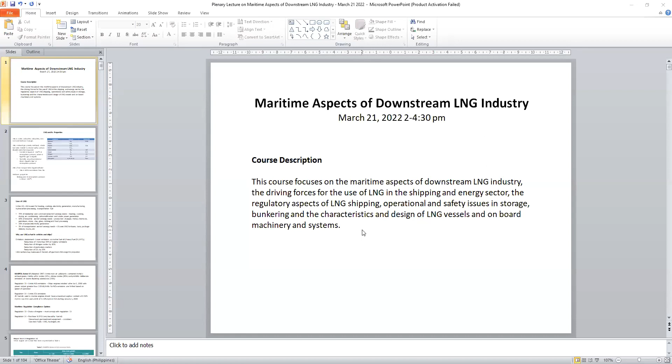Yeah. Can you hear me? Yes, sir. Yeah, okay. Yes sir. Loud and clear.

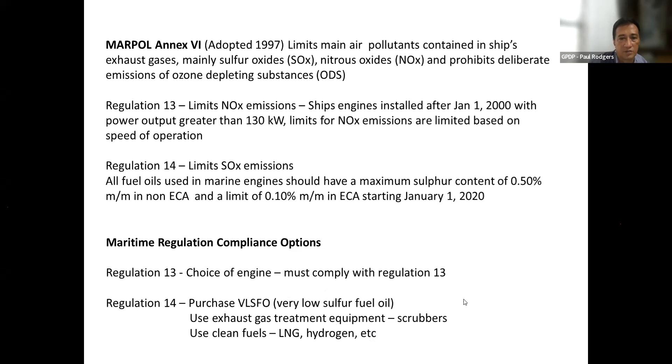Let's take a look at Regulation 13, which is about NOx emissions. Vessel engines are to have nitrous oxide limits as prescribed in Table 1. This table indicates the different levels of compliance - we have Tier 1, Tier 2, and Tier 3 engines. Tier 1 engines are primarily those installed and built on or after the year 2000. With these engines, these are the allowable levels of nitrous oxide in the exhaust. The N here represents the operating speed of the engine - we have very low speed engines, intermediate speed engines, and high speed marine engines.

For Tier 2, these are engines that were installed or built on or after the year 2011. Their nitrous oxide limits are even lower than the levels allowable for engines built earlier under Tier 1. And finally, we have Tier 3 engines, for vessels with engines built on or after 2016. Their nitrous oxide limits are restricted to much smaller amounts - Tier 3 is much stricter.

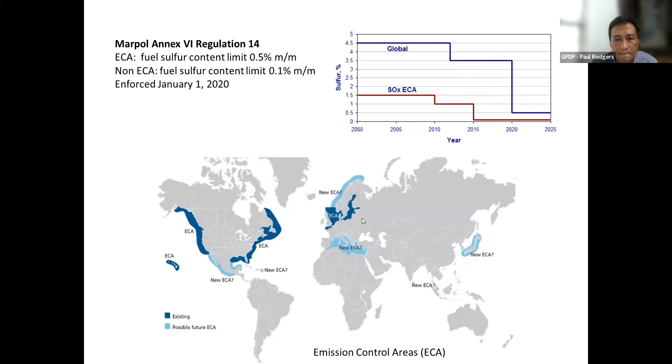It's a small area, but however, there are many recorded accidents with regards to LNG. So although it is said to be relatively safe because this area for which the vapor is combustible is small, there are many cases of recorded accidents, and some of them are quite catastrophic.

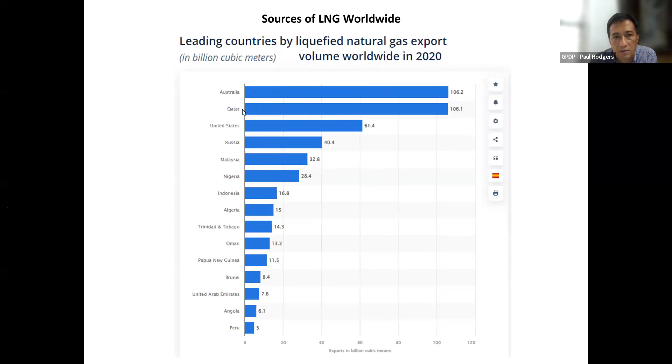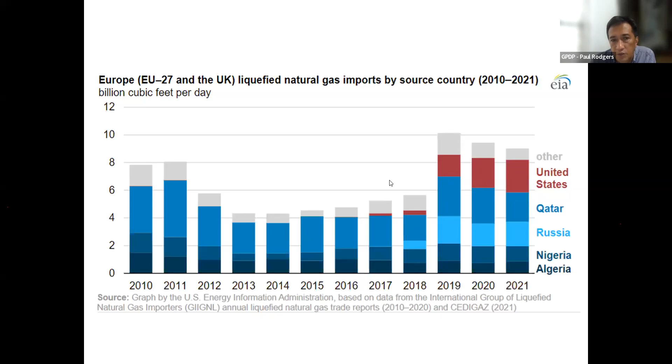Just a little bit of history - what was the first LNG carrier? The first LNG carrier was called the Methane Pioneer. It was originally constructed as a Liberty ship in 1945 for the Second World War. Later on, after the war, it was converted into an LNG tanker. The dead weight of the vessel was 5,000 tons, and it was used to carry LNG from Louisiana to Canvey Island in the UK.

It had a cargo area or cargo volume that could accommodate 2,000 tons of LNG, and it was utilized as an LNG carrier for 8 years. After 8 years, it was later converted to an LNG storage facility. So this vessel had a very long life, but it was relatively a small vessel.

In 1963, two sister vessels were made. These were launched in 1963 and entered service in 1964. These are the Methane Princess and the Methane Progress. These vessels were decommissioned and scrapped in 1997, so again a very long life, about 33 to 34 years in service.

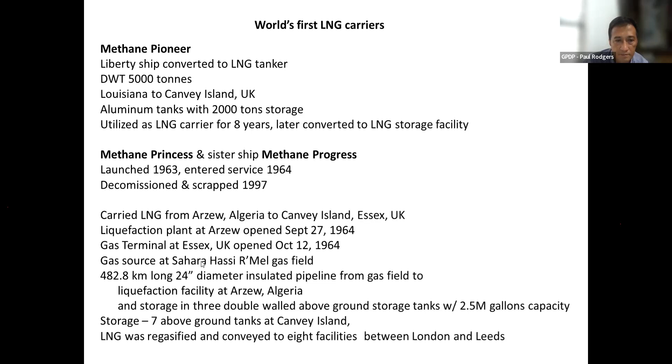they already used conventional fuel and boil-off gas from the cargo, so the engines were dual fuel. They provided 13,750 horsepower, giving the ship a speed of 17.5 knots, and there were 29 voyages per year for the vessels.

They provided LNG to 275,000 people per year. The vessels had 9 independent LNG tanks constructed from 5083 grade aluminum alloys, and they were insulated with balsa wood, plywood, and glass fiber.

So not much has changed, right? Even today, this is still the insulation being used, and the LNG cargo tanks are still sometimes made with aluminum alloys. Dual fuel is still used by some, with conventional fuel plus boil-off gas from the cargo.

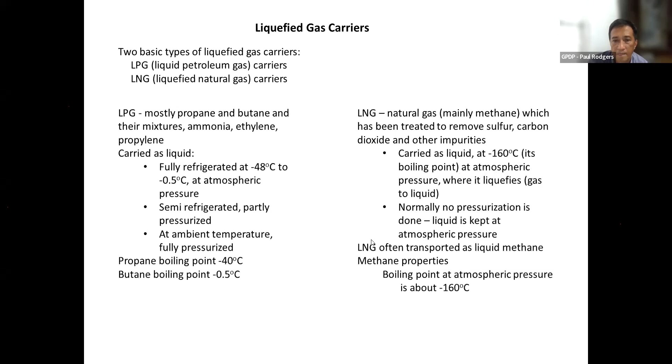LPG ships carry a liquefaction plant to reliquefy vaporized LPG. If you imagine, the cargo tanks are exposed to sunlight and heat, so the cargo inside heats up even if the tanks are well insulated, and as a result some of the gases boil off or evaporate. It would be a waste to just vent the gases.

LPG has a temperature of -40 degrees centigrade for propane, or -0.5 degrees centigrade for butane, so the temperature isn't too low, and the product or gases can be easily reliquefied.

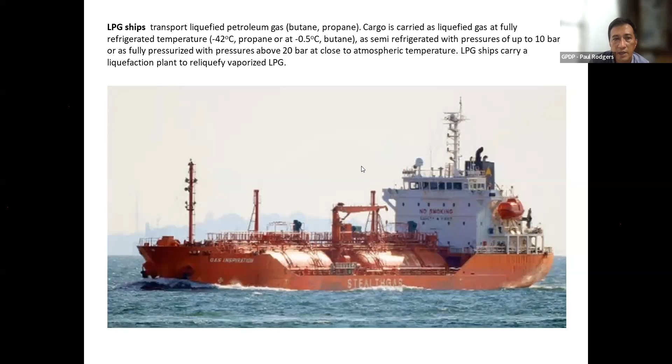But for LNG, the temperature is way lower, so a lot of work is necessary to reliquefy the boil-off gases. So instead of reliquefying the boil-off gas or venting it to the atmosphere, it is pressurized slightly, and that pressurized gas is fed to the main engines or auxiliary engines of the vessel.

So here are some common structures of tanks in LNG vessels. Tanks are well insulated to transport the liquid natural gas at cryogenic temperatures. Some of the tanks are prismatic in shape, as shown in the figure above, and some tanks are spherical in shape, as shown in this figure below.

So there are several types of tanks used for LNG cargo. The typical midship section of an LNG vessel looks like this. We normally have an inner tank that carries the cargo, and the vessel is usually a double hull tanker for protection of the cargo. Sometimes the spaces between the primary hull and the secondary hull are filled with nitrogen to create an inert atmosphere in between the cargo and the outside.

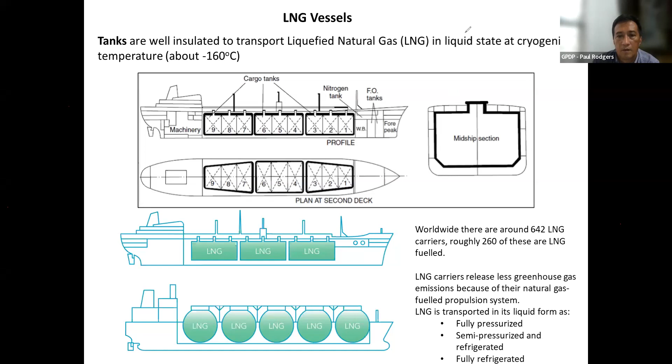Other than the spherical design, as mentioned earlier, we also have a prismatic design. We'll go back to the classification of tanks for LNG vessels later.

Now let's take a look at the LNG liquefaction process. When the natural gas is extracted from the earth, it passes through several processes. It passes through a gas metering and pressure control process, where the gas, initially at a temperature of 40 degrees centigrade, is set to a temperature of between 16 to 29 degrees centigrade.

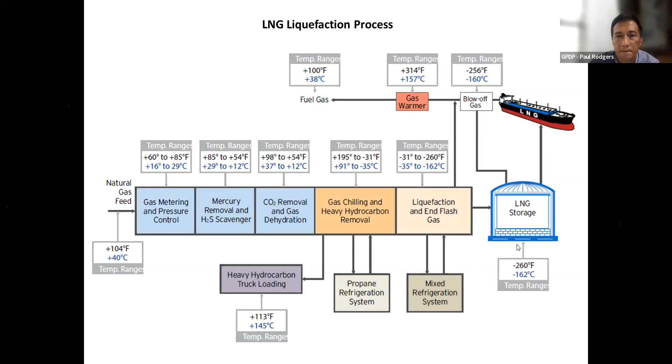So how does an LNG storage facility look like? This is a drawing of an onshore LNG storage facility. We have an inner tank, then a wall insulation, and an outer tank. The roof and the floor or bottom are also insulated. So the basic structure is you have two barriers, a primary barrier inside and a secondary barrier outside, and in between you have insulation to prevent heat transfer from occurring into the liquid cargo inside.

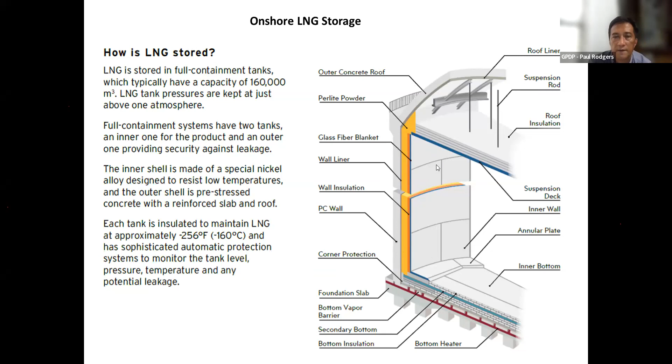We've been looking at LNG carriers, but there are actually a few other facilities that serve similar functions as LNG carriers: the FSU, FRU, and FSRU. These are offshore facilities. The FSU is a floating storage unit, used for storage only of LNG - there is no regasification done, only storage. FRUs are floating regasification units.

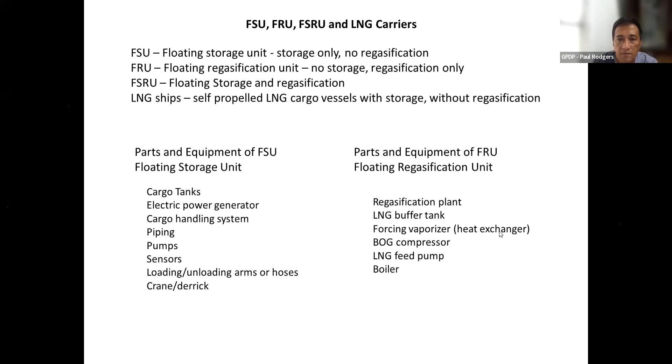For the FRU, or floating regasification unit, we have a regasification plant in the facility. But we don't have cargo tanks. So the parts, other than the regasification plant, we have an LNG buffer tank, a forcing vaporizer. This is a part of the regasification system. BOG compressor, or boil off gas compressor, increases the pressure of the boil off gas coming from the tanks when the FRU is connected to a storage facility. And we have the LNG feed pump and a boiler. So the boiler again is a part of the regasification system of the FRU.

On the other hand, we have cargo tanks, a cargo handling system, pumps, pipings, sensors, and loading and unloading arms or hoses, and a crane and derrick, which is for cargo handling.

So here's a schematic diagram of an FSU. We have the cargo tanks. This is primarily for storage, but we do have machinery to produce electricity, and we have a pumping system. And we have the derricks or cranes and the cargo manifold at both sides for loading and unloading LNG to the FSU. So these are the facilities of an FSU.

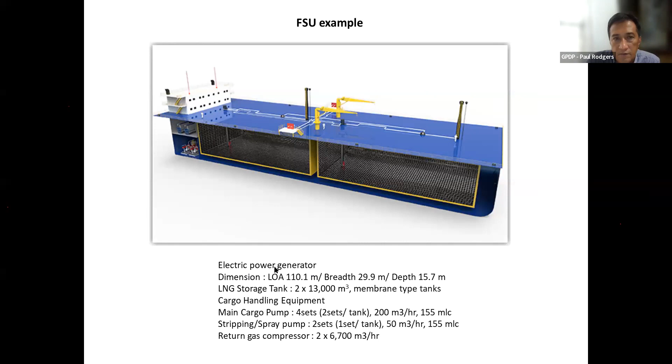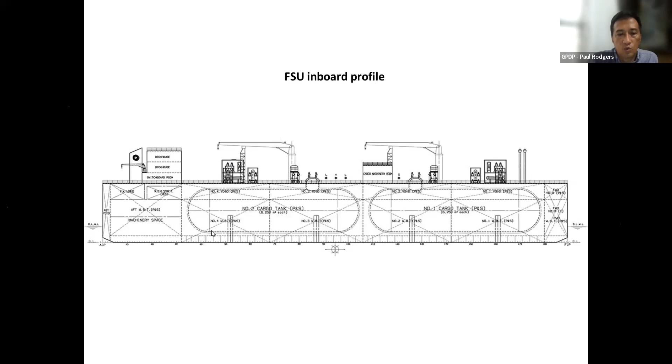This is a drawing of the inboard profile of an FSU. So we have the cargo tanks. We have probably the cargo handling facilities, and we have the crane, and we have the manifolds. And in the aft of the vessel, we have the machinery space and a pumping station to handle the liquid LNG.

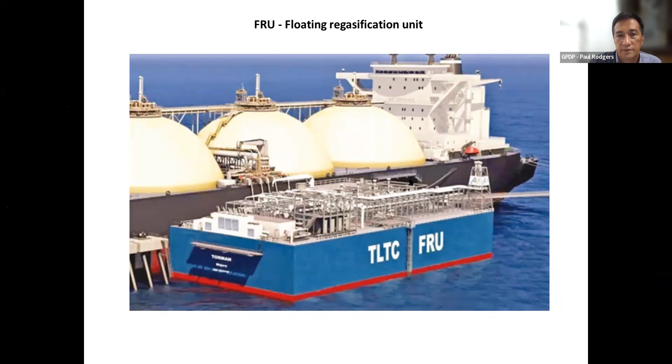So here's another possible setup. Here we have an LNG carrier, an FSU, and an FRU. And from the FRU, the LNG goes to the client or the customer. In this case, the client is an LNG power plant. So the LNG carrier delivers LNG to the floating storage unit. The floating storage unit delivers LNG to the regasification unit, and the regasification unit now delivers LNG in gaseous form to the power plant.

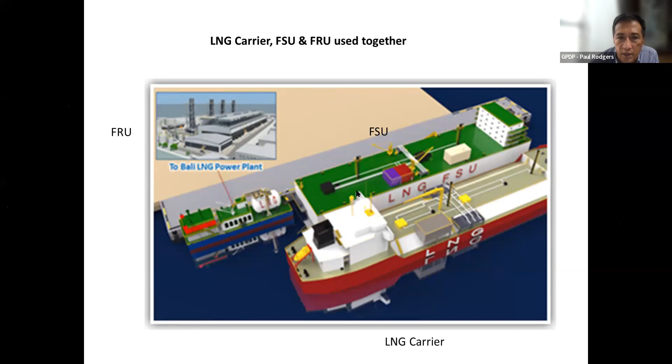However, one limitation of FSRUs is that they have potentially smaller capacity than onshore facilities, and also a shorter lifespan because the vessel itself is subject to marine conditions. The environment is somewhat corrosive, and the action of waves and other environmental influences could shorten the life of the vessel.

But again, it's a good option for a facility that uses LNG, because instead of building their own onshore storage and regasification facility, they can just charter a vessel like this. Chartering would shorten the lead time and also shift the financial burden of a huge investment on a facility and put it on charter expenses instead.

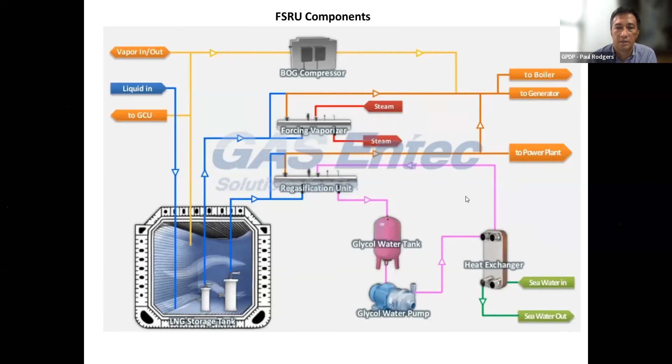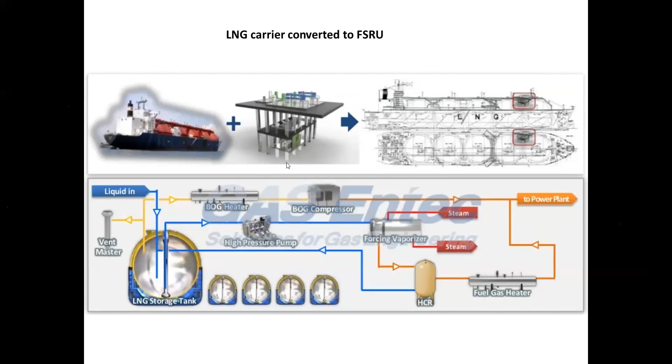Here's a picture of a conversion of an LNG carrier to an FSRU. What's added here is the regasification unit, which essentially is a heat exchanger, which in some cases makes use of seawater to heat up the LNG. So this is the structure after regasification. Sometimes we have a fuel gas heater to help in the regasification.

So again, here's another example of a converted vessel. What was added is just the regasification unit. It transforms the LNG at -160 degrees centigrade into gas at a higher pressure. Seawater is used to heat the LNG from -160 to around 8 degrees centigrade.

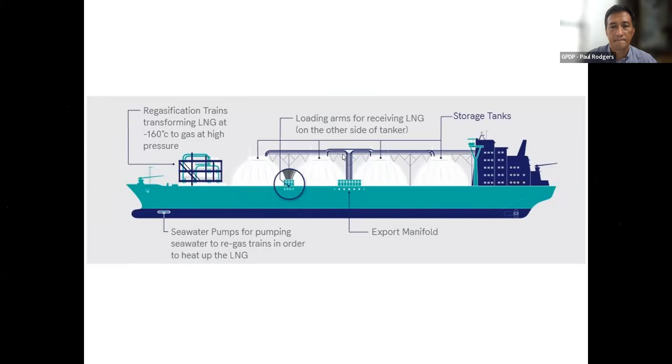What are the risks associated with an FSRU? Of course, we have fire and explosion. As I said earlier, methane can burn only at a certain concentration, but many accidents are still recorded in LNG operations.

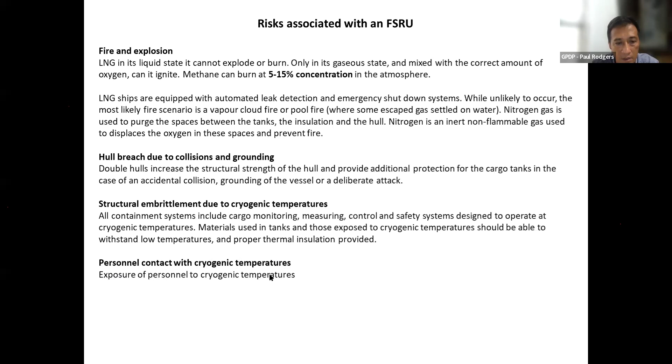What are the design standards used for LNG vessels, FSUs, FRUs, and FSRUs? One of the entities or organizations that have design standards are the classification societies. Primarily active among these classification societies are those that are members of the International Association of Classification Societies.

Like ABS, Lloyd's, DNV, BV, GL. There's also a standard, the IGC code, which is used for construction of equipment of ships carrying liquefied gases in bulk. Of course, the design constraints would be, other than the particulars of the mission of the vessel, environmental regulations, such as sulfur oxide emissions, particulate matter emissions, NOx, CO2, and solid and liquid waste regulations.

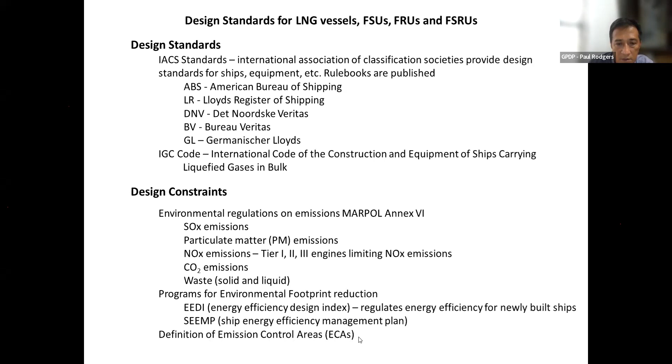Design constraints also include programs for environmental footprint reduction, like EEDI and SEEMP. EEDI is Energy Efficiency Design Index, and SEEMP is the Ship Energy Efficiency Management Plan. Emission control areas also influence the type of engines used for the vessel, since they define the emission limits.

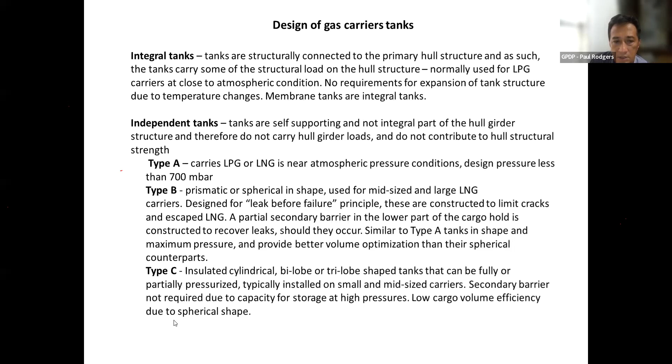Normally, the aluminum is better than steel for the inner space, because the aluminum can withstand lower temperatures without any embrittlement of the metal. And normally there is an inert space in between the insulation and the inner tank to provide additional insulation for the cargo.

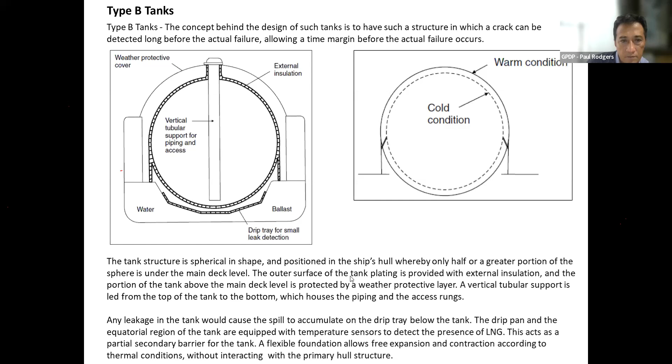For Type C tanks, these are designed as cryogenic pressure vessels. The condition of the cargo here is pressurized, not atmospheric pressure or something near atmospheric pressure. Pressures could range above 2,000 millibars, and the tanks are designed to be pressure vessels, using conventional pressure vessel codes.

These tanks do not require a secondary barrier. Rather, to detect leakage from the tanks, the cargo hold space is filled with inert gas or dry air, and sensors are placed in the hold space, which can detect changes in composition of the inert gas or dry air due to vapor pressure of the fuel. Leakage can therefore be detected and prevented.

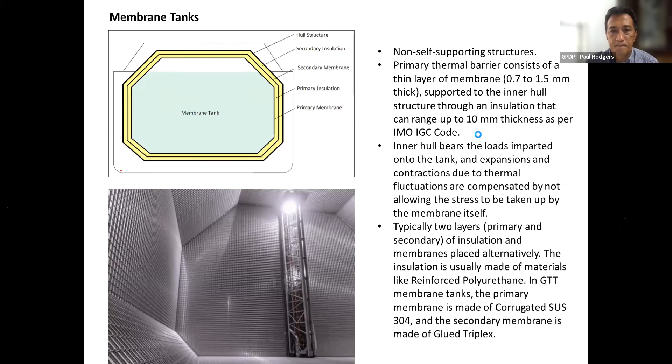So again, if you look at the classification of the LNG tanks, we have integral tanks and independent tanks. The independent tanks are classified as Type A, Type B, and Type C, and the membrane tanks are integral tanks. Integral tanks carry some structural load, but the cargo is primarily in a refrigerated or cryogenic condition, but at atmospheric pressure. On the other hand, with the independent tanks, these tanks do not carry any structural load.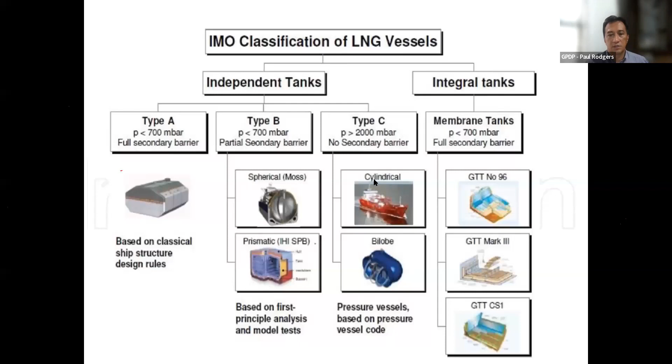They are not really connected rigidly to the hull of the vessel, and we have Type A and Type B at low pressures, but Type C is a fully pressurized design.

Okay, now let's take a look at the bunkering operation, precautions, procedures, and checklists. Bunkering is the process of transferring oil supplies to the ship, and it is normally done in ports before, but now it can be done at sea under normal weather conditions. This is called ship-to-ship transfer or ship-to-ship bunkering.

Bunkering could be from an onshore facility, or it could be done from trucks, or it could be done from ships. So depending on the source, it could be shore-to-ship bunkering, truck-to-ship bunkering, or ship-to-ship bunkering. And the receiving ship is a vessel that receives the LNG from the source.

What are the advantages and disadvantages of ship-to-ship bunkering? For the advantages, we no longer need to turn the ship off course for bunkering because it can meet up with the bunkering vessel on the sea. It saves a lot of time that takes to go to a particular port for the purpose none other than bunkering.

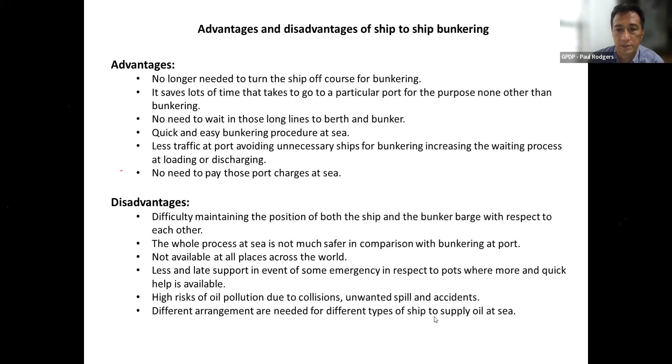What are the preparations and checks before doing bunkering operations? First, there has to be a ship compatibility study. The bunkering barge and the receiving vessel have to clarify each other's roles and responsibilities. They have to agree on a delivery location with the proper permits in place. And if the vessel is bunkering on port, does the vessel fit the jetty?

Also, they have to check if the hose lengths or the piping lengths and dimensions are correct for the operation. And also, they have to check whether emergency shutdown equipment are available.

There are two basic types of emergency shutdown. Number one is stopping operation, and number two is through the use of a quick disconnect or quick separate hose or loading arm. There are designs of quick connect, disconnect hoses, whereby if the hoses are pulled apart, there is a closing mechanism on each part of the hose to prevent any spillage of LNG from either side, whether from the bunkering barge or from the receiving vessel.

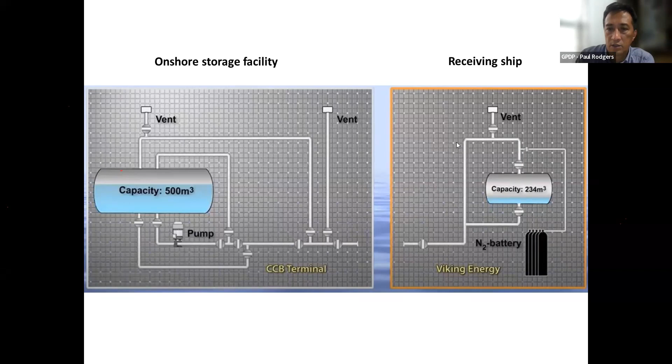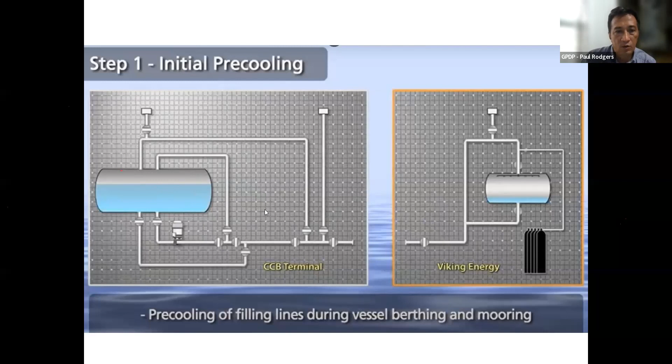The initial step is pre-cooling. The pre-cooling of the filling lines should be done during the vessel berthing and mooring. Beforehand, this operation can already be started when the vessel approaches the berth. So what happens here? First, you allow vapor to go through the pipes, the outer pipes, vapor only for now. The intention here is to allow some initial pre-cooling of the piping, because the LNG is at a very low temperature. This is normally at ambient temperature, so there's a difference of around 180 degrees Celsius.

So if this is not pre-cooled, there could be some sudden flashing of liquid to vapor, and that could lead to sudden increases of pressure in the piping. So the piping needs to be cooled down well. But this is still pre-cooling because what's being used is vapor first.

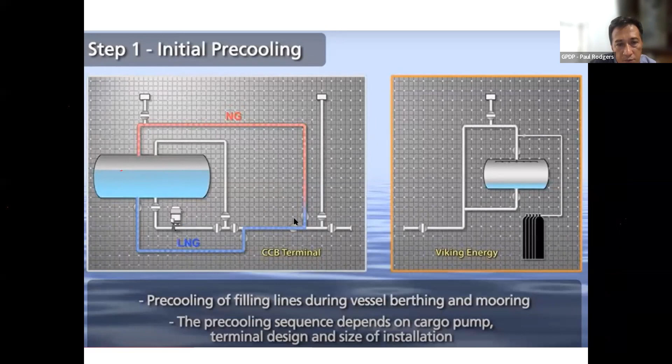And then you allow liquid LNG to flow through the piping. This is much colder, but the pump isn't being used yet. So when the liquid fully fills the lines, then you have fully cooled or pre-cooled the piping. This occurs at a duration of around 45 minutes.

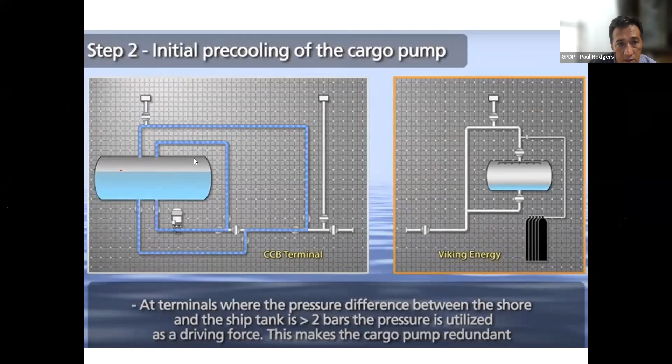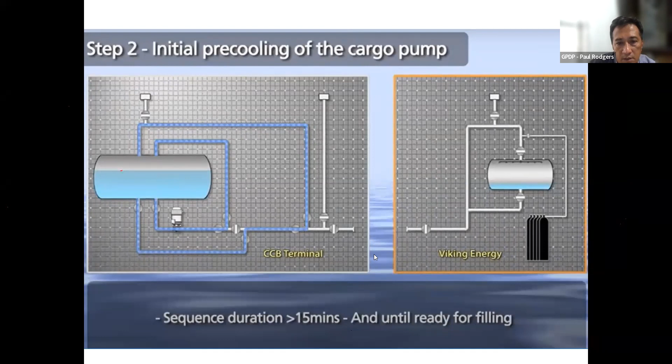But then you also need to cool the piping system where you have the pump. So what you do is you allow liquid to flow through the inner loop. Then after that, which is around 15 minutes, until ready for filling, now we go to the next process of connecting the bunker hose.

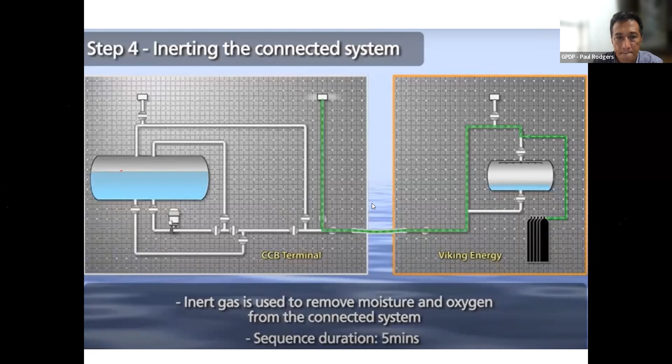Once the liquid nitrogen has inerted the system, we now allow LNG vapor to permeate the piping. The LNG vapor will now push the nitrogen out of the pipe. So after that, now we have a piping system full of LNG vapor, and we have now purged the connected system.

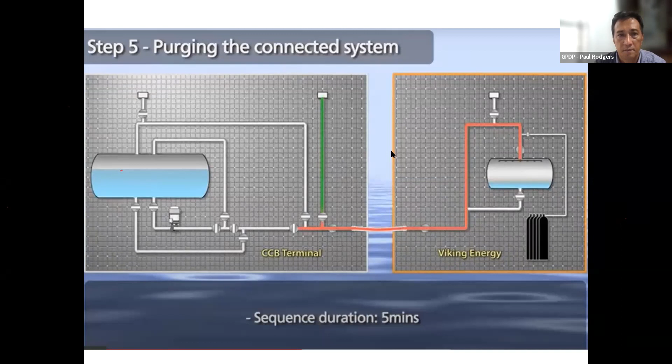Now we allow for the filling. We open the pump and allow liquid LNG to be delivered from the storage tank to the tank that has to be filled. The transfer speed range will vary depending on the size of the tanks, the size of the piping, and the type or power of the pump.

After filling operations with liquid, we have a sequential filling operation for pressure control of the receiving tank. The duration of LNG transfer for this vessel is approximately 2 hours. During transfer of LNG from storage to the tank, the tank pressure has to be continually monitored.

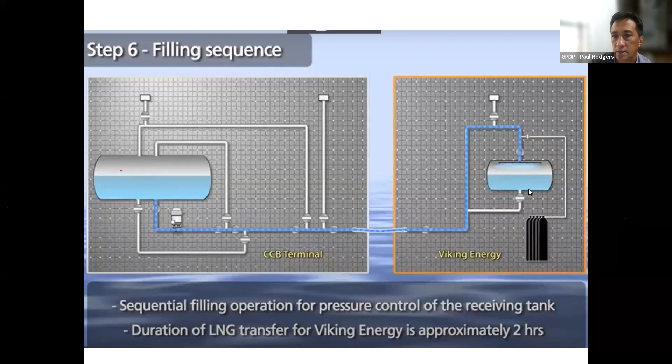After the tank has been filled, the pumping operation is stopped and the gas is allowed to generate on the pipes. The heat coming from the environment will hit the pipes and create LNG vapor, and the LNG vapor will push back the liquid to each of the tanks. The natural gas pressure buildup due to the temperature rise will force the LNG residuals in the pipes back to the tanks.

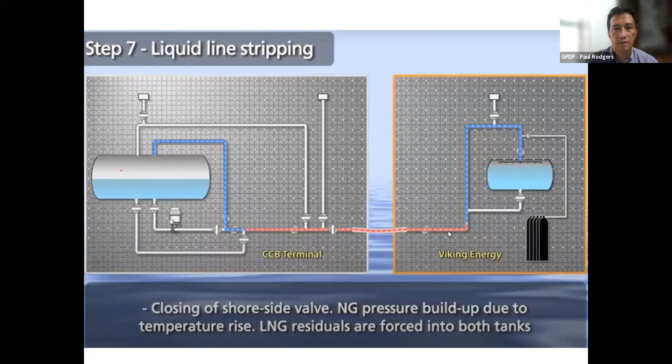And the closing of the shore side valves pushes the remaining LNG into the vessel tanks. So in this case, after the expansion of the LNG in the pipes, all liquid will now be removed from the piping.

After that, again, the liquid line has to be inerted using nitrogen. So we open again the valves from the nitrogen tanks, and the nitrogen is allowed to flow into the pipe to push the natural gas inside the pipes and vent it outside.

So there is a bit of discharge, discharge of methane into the atmosphere. And methane has 25 times the warming potential than carbon dioxide itself. So this is not a good process, but the industry is still searching for a solution to have this, or to generate a zero emissions process for this.

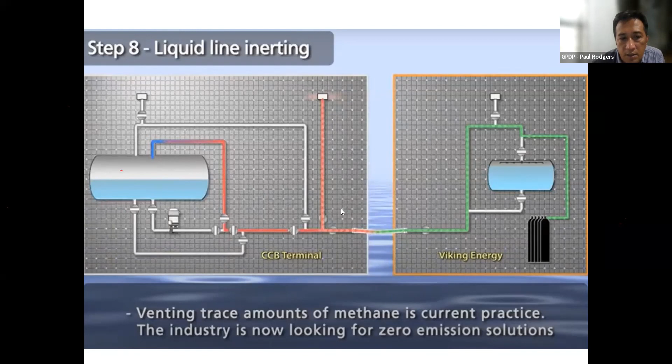So after this is inerted, this approximately takes about 5 minutes for that vessel. The nitrogen pushes all the LNG vapor from the piping, it's vented outside, and the valves are now closed.

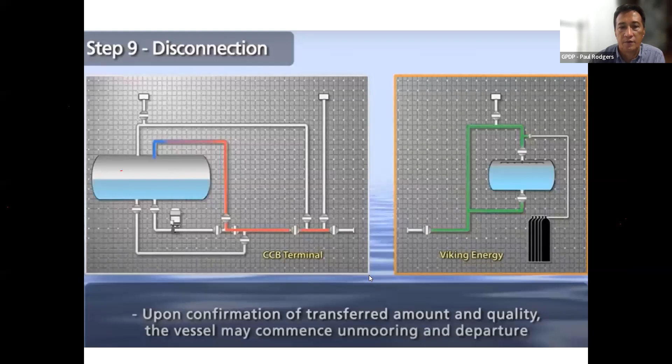And when the transferred amount and quality of the LNG is confirmed, the vessels may now disconnect the hose piping. So after that, they have to make a bunker delivery note, or BDN.

This is a document that records the fuel transfer between both vessels, and copies of the document are kept by both the supplier and the ship for further use and compliance with regulations. They have to keep the document for the next 3 years.

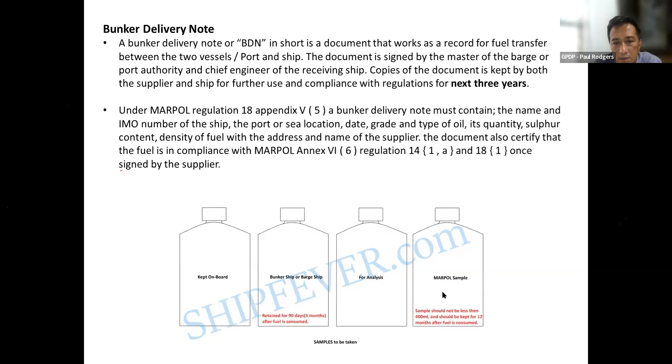Under MARPOL Regulation 18, 4 samples have to be taken of the bunker. One goes to the supplier, one goes to the ship, one goes for analysis, and the other is kept for MARPOL. So that's the 4. One is kept on board, one is given to the bunkering ship, one is for analysis, and the other is for storage for MARPOL.

So looking back at the LNG bunkering sequence: first, pre-cooling of the onshore pipes upon approach of the incoming vessel. Then vessel docking and mooring. Then we earth the vessel and the piping to prevent any development or generation of an electrical spark. Then we establish the hose connection, inert and purge the piping system, and do the bunkering operation. After this is done, we inert the piping system again, and then disconnect the bunkering hose.

So with that, the discussion on bunkering is done. Now let's take a look at marine LNG engines.

Marine LNG engines are dual fuel engines that use natural gas and bunker fuel to convert it to mechanical energy. So they use the normal fuel, and in addition to that, they also use the boil-off gas coming from the cargo or fuel tank to generate mechanical energy. And because natural gas has already been treated, with sulfur and hydrogen sulfide removed, it is a clean gas to burn. The addition or use of LNG will just improve the emissions of the vessel in general.

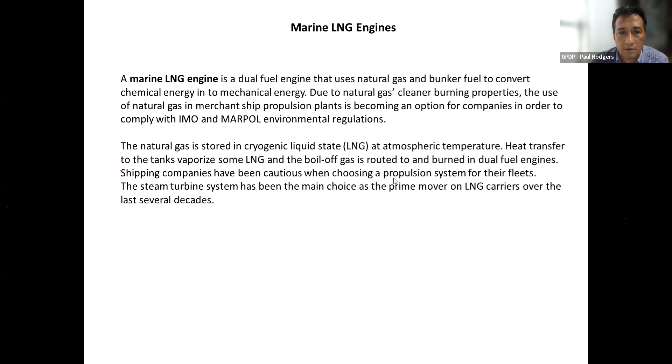So we use the boil off gas. The boil off gas is normally around 0.1 to 0.25% of the ship's capacity. So kung 1,000 tons,

0.1% to 0.25% of that could be lost due to boil off, especially if it's just vented. But the boil off gas now is usually either re-liquefied or used for fuel, as power for the engines. Now, what engines are normally able to use LNG fuel? We'll look at that later.

What are the positive factors to use LNG as fuel? Number one, we have low sulfur emissions, so the vessel can go to sulfur emission control areas, low NOx, which is important for upcoming nitrogen emission control areas (NECAs), which are still being developed. We have lower CO2 emissions and lower particle emissions. Further, there are no regulations from the IMO on the use of LNG as fuel. Also, because LNG is a clean fuel, we end up with engines that are normally cleaner than usual, and therefore the cost of engine maintenance becomes smaller.

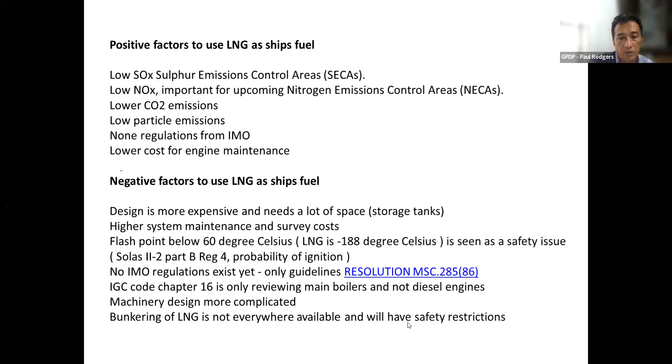No IMO regulations exist yet regarding the use of LNG as fuel, only guidelines, for example Resolution MSC 285. With regards to the IGC code, Chapter 16 only covers main boilers and not diesel engines, so the use of LNG as fuel is still not included in the IGC code. Machinery design is also a bit more complicated than usual diesel engines, and bunkering of LNG is not everywhere available, which therefore brings safety restrictions.

So these engines that use both LNG and the traditional heavy fuel oil or marine diesel oil are called multi-fuel engines. The engines work in the Otto process when using natural gas, due to the extra amount of air required to ensure proper combustion of natural gas and to avoid knocking during combustion. When natural gas is used, these are called lean burn engines because of the high air to fuel ratios necessary to burn the fuel.

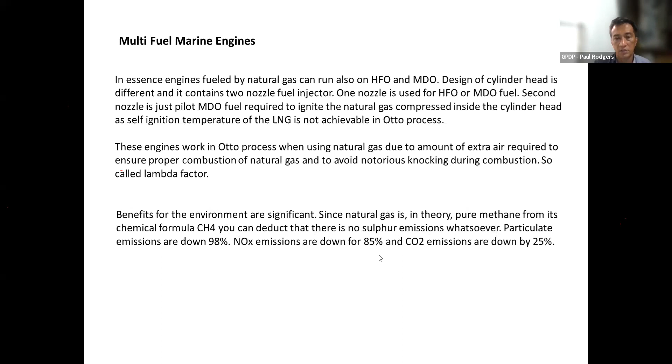But with the use of LNG, the benefits for the environment become more significant. Since natural gas is mainly methane, there will be no sulfur emissions, and particulate emissions and NOx emissions are cut down.

Here's a concept design for a dual fuel powered container ship. The main engines and generators will both be dual fuel combustion engines. This will have a lower environmental impact and also higher efficiencies. It uses a fuel gas supply system which has very low power consumption, compact size, and uses a high pressure liquid pumping and vaporizing system, and it uses boil off gas from the LNG cargo tanks or LNG fuel tanks.

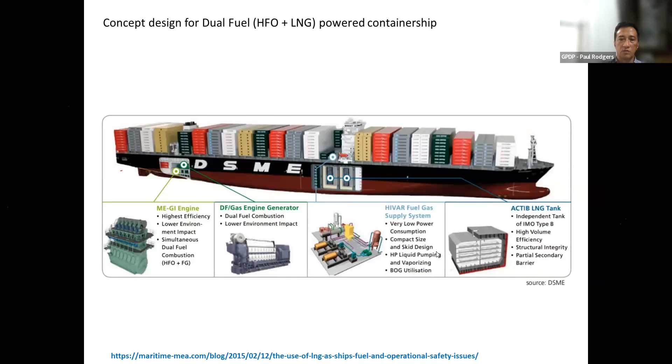Now, of course, the boil-off gas can either be reliquefied and returned to the tanks, or consumed as fuel. So here are the propulsion options for LNG carriers. If we want to use the boil-off gas as fuel, we can use it in a steam turbine, a dual fuel engine, or a gas turbine.

With the steam turbine, the drive is a mechanical drive. With a dual fuel engine, this could be an electric drive or a mechanical drive. Because if it is an electric drive, the dual fuel engine will run generators, and the generators will be the ones to supply electrical power to the propulsion system of the vessel. So that's why it's called electric drive. On the other hand, it can also be a mechanical drive system. So in mechanical drive, the dual fuel engine will be directly connected to the propulsion shafts of the vessel. And with the gas turbine, this is normally an electric drive. The gas turbine is connected to a generator, and the generator provides the electricity for propulsion and other loads of the vessel.

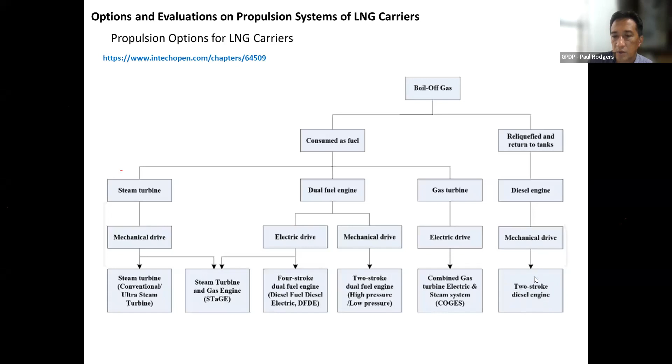On the other hand, if the boil-off gas is not to be used as fuel, it has to be reliquefied and returned to the tanks. So the option here will be to use a diesel engine. This will be a mechanical drive, and the two-stroke engine is a viable solution for this selection.

Let's look at the steam turbine option. Here we have the cargo tank, we have the BOG or boil-off gas. The boil-off gas compressor compresses it to bring it to a higher pressure, and it is fed to a boiler. In the boiler, the boil-off gas is burned and it generates heat, and the heat produces steam. So the steam is now fed to a set of steam turbines. So we have a high pressure turbine and a low pressure turbine. These directly drive the propulsion machinery. And also the steam can be used to drive steam turbines that are connected to generators that will generate electricity that is necessary for the vessel. So that's the steam turbine option.

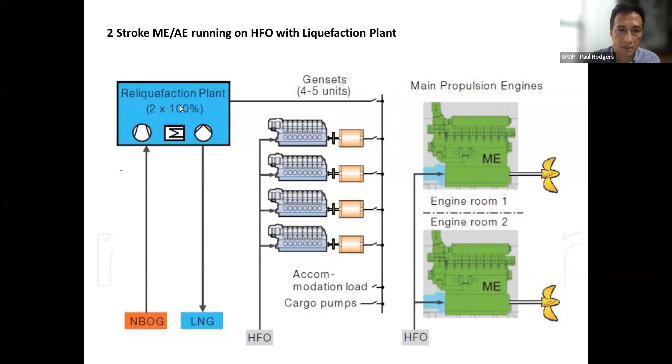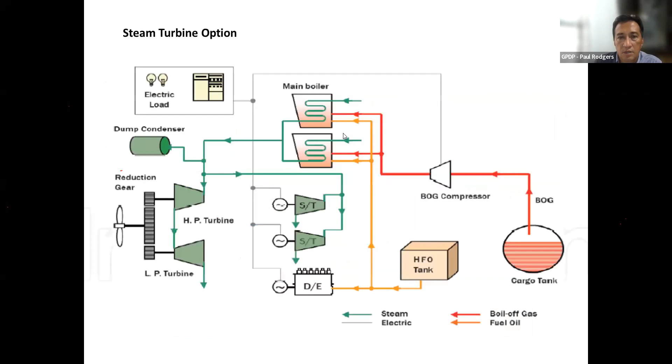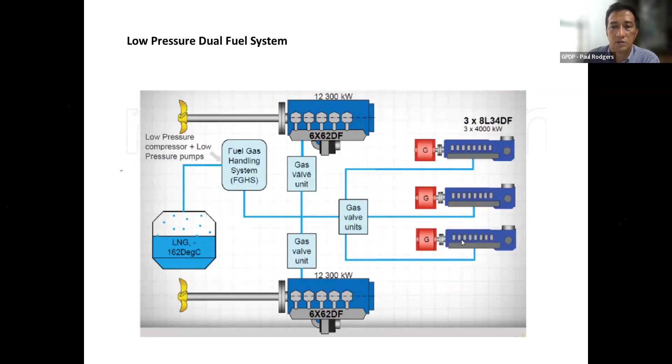Here we have the dual low pressure dual fuel system. So there's no compressor attached after the boil-off gas. So the boil-off gas is directly induced into the engines, whether it be the main engines or the auxiliary engines.

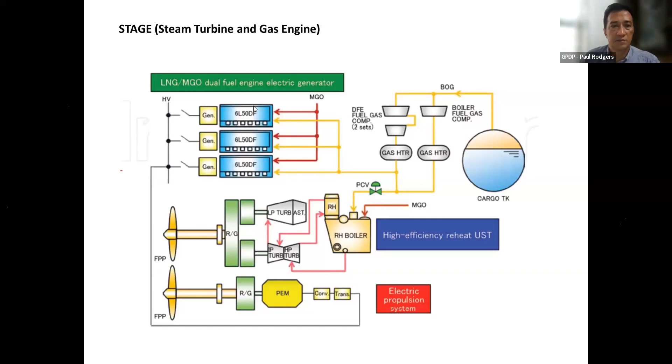Okay. Angelo, do we have time for, I think I have several slides... See, okay, I'll just go ahead with the lecture now.

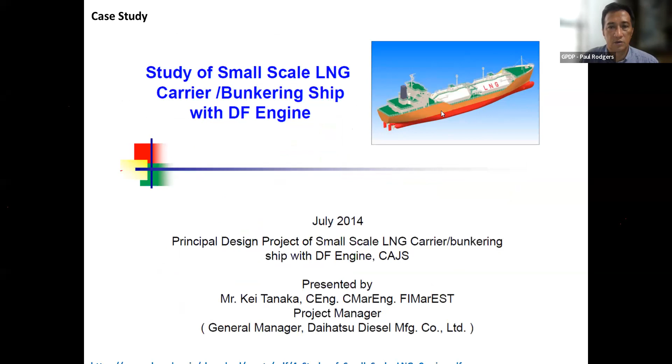This is a case study of a small-scale LNG carrier bunkering ship with a dual fuel engine. This study was done in Japan in the year 2014, and the process was for the design and selection of some machinery for an LNG carrier. The members of the study included shipbuilders and the association from the shipbuilders, shipping companies, two shipbuilders, a tank manufacturing plant, an engine manufacturing plant, and a classification society. So it's a cooperative study.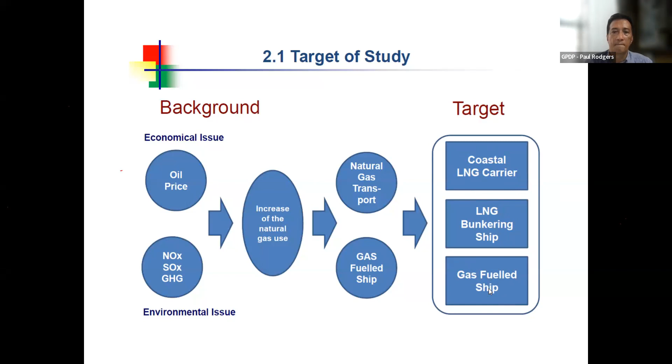The target of the study was to develop a coastal LNG carrier that would serve the coastal areas of Japan for the purpose of bunkering vessels that ply along those routes. So it would be an LNG bunkering ship, and the ship will be a gas fuel ship. The study came from the observation that although there were about 50 gas-fueled vessels operating on the coast of Japan, there was only one bunkering vessel available. So that was a good opportunity to study what type of LNG bunkering ship had to be developed.

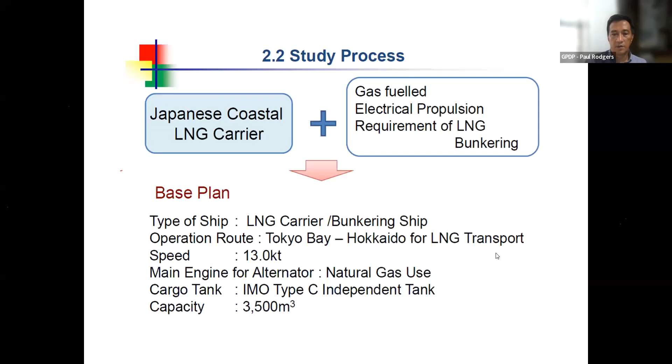So the base plan was to develop an LNG carrier and bunkering ship. The operational route would be between Tokyo Bay and Hokkaido, and this would be used for LNG transport and bunkering. The speed will be 13 knots. The main engine for the alternator will use natural gas, and the tank type will be an IMO Type C independent tank with a capacity of 3,500 cubic meters.

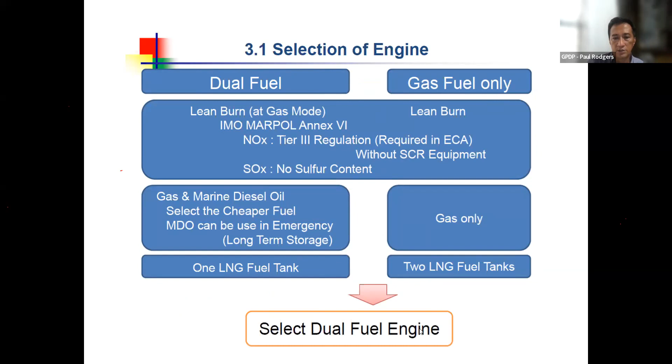And the engine was selected. There were several options, whether to use a dual fuel engine, a gas fuel engine, or gas fuel only. So based on different criteria, the dual fuel engine was selected for that vessel.

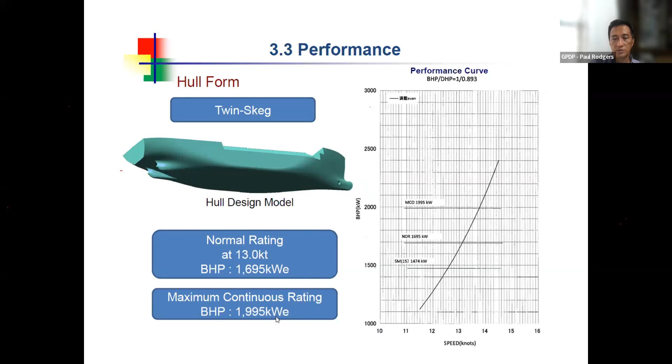This will be the expected performance of the hull form. The required brake horsepower for 13 knots would be 1,695 kilowatts, and the maximum continuous rating for the propulsion system would be 1,995 kilowatts.

This is the electrical power supply demand. We can see that the electrical power for propulsion would vary according to the operating conditions. If the operating conditions are MCR conditions, the power requirement will be very high, but at departure and arrival conditions, for example, it will be relatively low. Based on this, the alternator output was decided to be greater than 757 kilowatts.

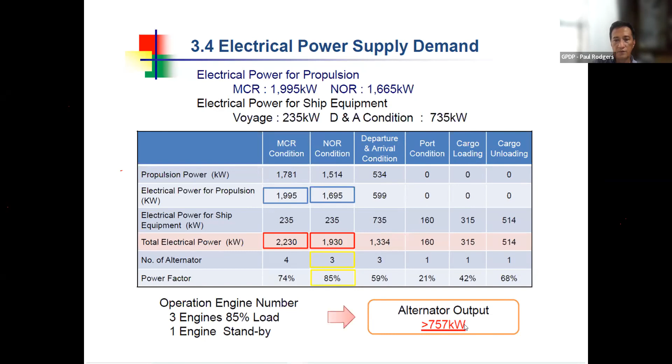So here's the final LNG fuel supply system for the vessel. We have the cargo tank, which will supply fuel to the LNG fuel tank through a pump, but there will be a BOG excess towards the LNG cargo tank. That BOG will be compressed, preheated, and fed to the engines as fuel. Also, part of the fuel that goes through the LNG fuel tank will be gasified through the LNG vaporizer and fed to the gas heaters before it is fed to the engines. So this was the selection for the system to be used for fuel delivery to the engines.

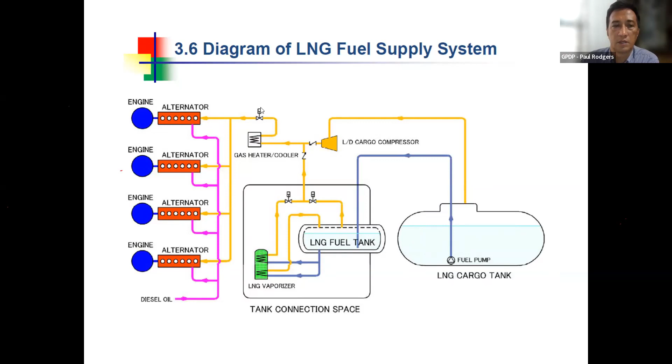This is the arrangement of the LNG fuel supply system. There is a portion where the liquid goes to the liquid fuel, the LNG, to the LNG fuel tank.

And it will be vaporized before it is fed to the gas supply unit, which delivers vaporized fuel to the engines. On the other hand, boil-off gas will be compressed to the proper pressure before being fed to the gas supply unit.

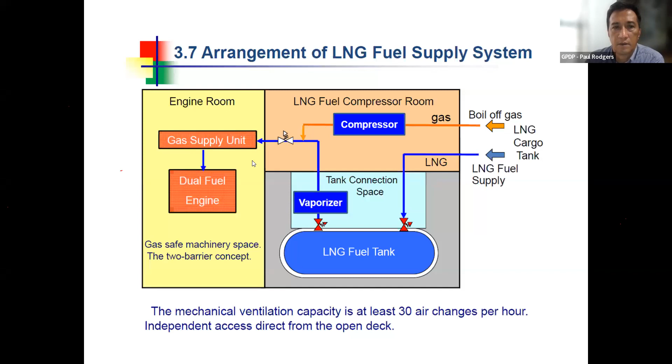So here are the requirements for this bunkering vessel: hardware, freeboard height difference between both ships, treatment of boil-off gas, fuel ship, and mooring of ships. The relative positions of the bunkering ship and the gas fuel ship will have to be considered for bunkering.

And with regards to the software, this pertains to the bunkering procedure, mooring risk arrangements or assessments, seafarer training and qualifications, and marine disaster prevention system.

So in effect, these were the main particulars of the vessel. These are the main arrangement or the general arrangement. The main particulars of the vessel will be as follows.

Gross tonnage of about 5,200 tons, an overall length of 107.8 meters, breadth of 17.2 meters, a depth of 7.8 meters, a draft of 4.6 meters, a deadweight of about 2,650 tons, a speed of 13 knots, and a cargo tank volume of 3,500 cubic meters.

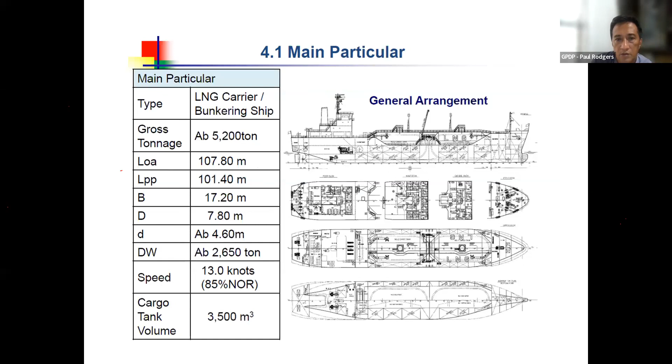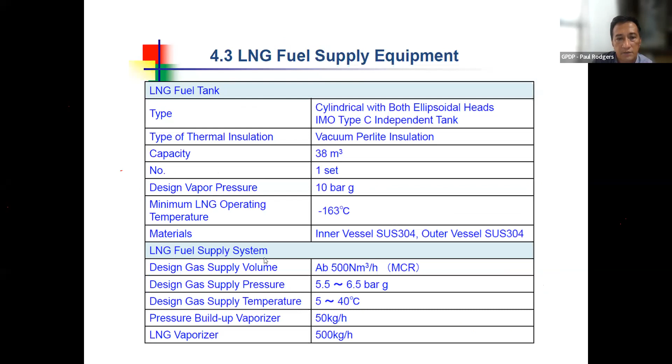And these are the specs of the LNG fuel tank, the LNG fuel supply system, and the LNG cargo tanks, and the cargo handling system.

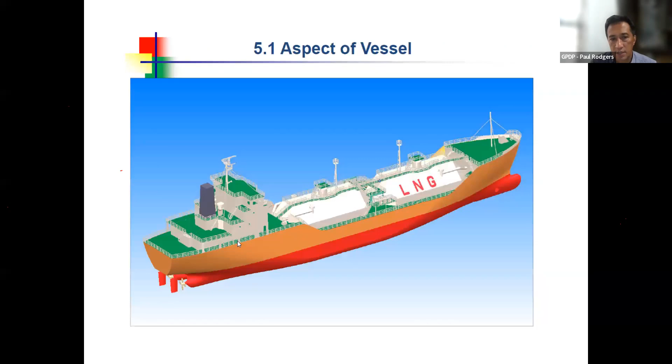So this is an isometric view of the vessel, and this is a detail of the cargo handling area that will be used during bunkering of the vessel.

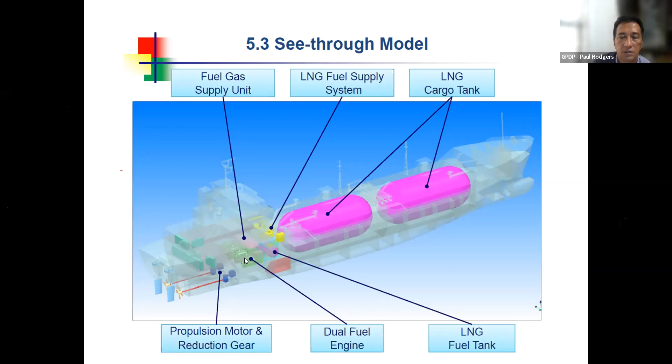And this is a view of the fuel supply system, and this is an arrangement of the equipment in the stern area. So on the far right, we have the cargo tanks; here we have the fuel tank. We have the fuel handling system, the gas supply unit, dual fuel engines with the alternators. The alternators feed electricity to the motors, which will provide power to the propulsion shafts.

And for the last topic of this discussion, this is about the preparations necessary for LNG industry expansion in the Philippines. Number one is the readiness of policy and the regulatory framework for the LNG downstream industry. This will include shipping regulations, shipbuilding regulations, and permitting systems for businesses.

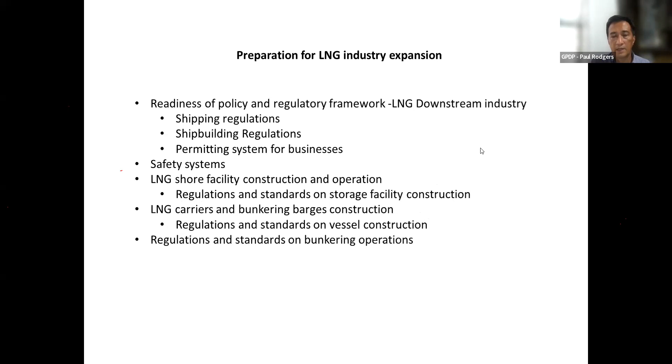Another item is the development or preparation of safety systems, LNG shore facility construction and operations, and the regulations and standards necessary for the construction of storage facilities. Also, regulations and standards for vessel construction, particularly LNG carriers, bunkering barges, FSUs, FSRUs, and FRUs, and regulations and standards on bunkering. So those will be items that our different government agencies will be working on, since the LNG industry is just a new industry to the Philippines.